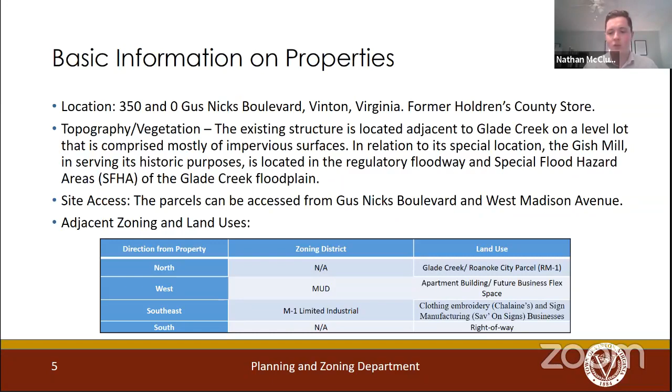To the north is the creek, and across from the creek is Roanoke City, where our jurisdictional line is. West of it is the Billy Bird Apartments, the future site of the Billy Bird annex building, and the Glade Creek Greenway. Southeast is Chalaine's Embroidery and the Save on Signs industrial property. To the south is Gus Nicks Boulevard, which has a really wide right of way.

This graph shows exactly where it's within the floodway, marked with hash marks on the floodplain layer. The blue layer is the 100-year floodplain, and the orange layer is the 500-year floodplain. In terms of regulations, you just focus on the 100-year floodplain and the floodway.

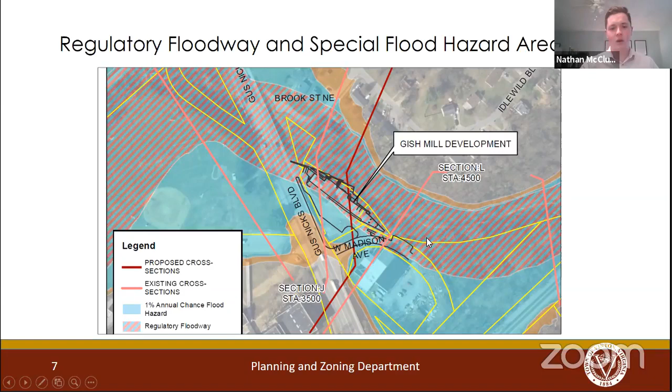This calls for special considerations for the building because, being a CRS Class 8 community, we enforce our floodplain ordinance strictly and go above and beyond the minimum standards of the National Flood Insurance Program. Because of that, if this were an empty vacant property and someone wanted to build on it in the floodplain, it would be a really cost prohibitive project.

With this being a historical structure, there's a certain degree to which you're allowed a substantial improvement to a building if it's deemed historical. This building has been deemed historical and is currently eligible for listing on the National Register of Historic Places. So that checks off the box for whether we could substantially improve this building.

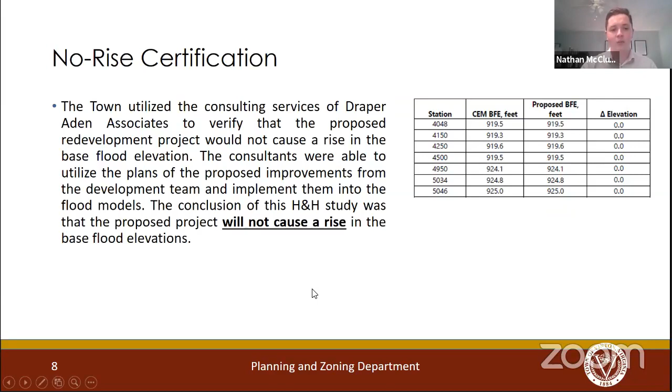The next phase is getting variances to prove that all the proposed redevelopment of the property and its activities will not cause even an inch rise in the floodplain levels. We contracted with Draper Aden, and they took the model from the group at Hill Studio and the development team and put it into the flood model. They showed a rise of 0 — no rise at all in the base flood elevations from any of the activities involved with this redevelopment.

As I mentioned earlier, on March 30th we're going to have to go before the BZA, as the town and the property owner, to request certain variances — not a wholesale exemption from the ordinance, but certain exemptions because of its historical nature. For instance, you can't elevate the building entirely because it's just not physically possible to do so without destroying its historical nature. There are other regulations included in that variance that the BZA will be briefed on and hold a public hearing on.

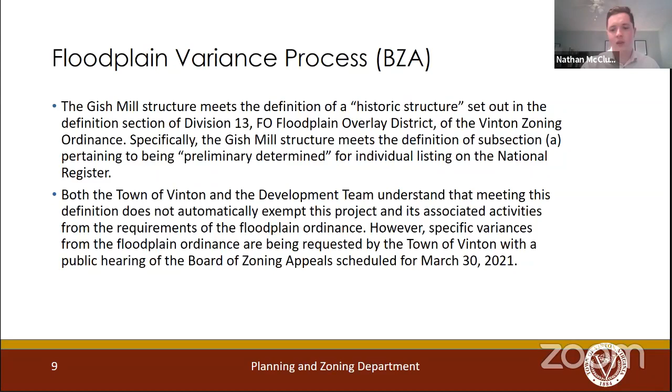This is in the basement. The basement is a pretty incredible feature of this property — the ceilings are really tall, and they have the original machinery. You can see the wheel inside that was powered by the water wheel outside. It also has a really incredible stone foundation.

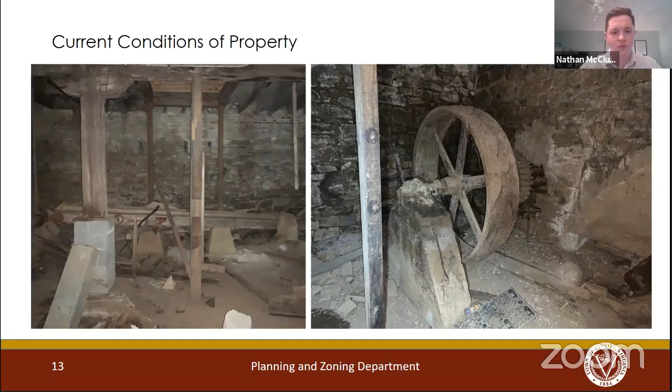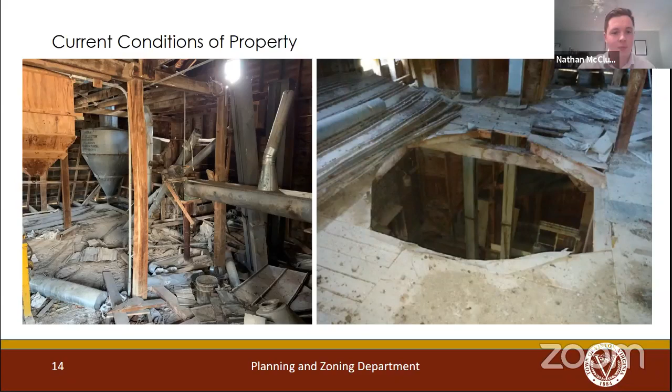Here's some of the second and third floors. As you can see, someone at one point had to cut a hole in the floor, possibly to get machinery in or operate some kind of equipment.

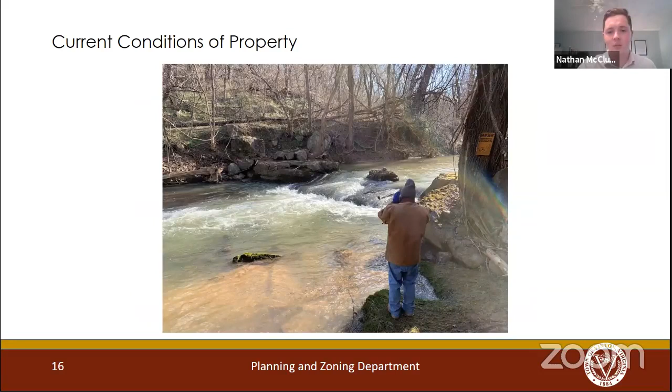This is the backside of the building. That's the race, or the sluice, where water would go and be diverted from the dam. And there's the dam, or what will remain of the dam.

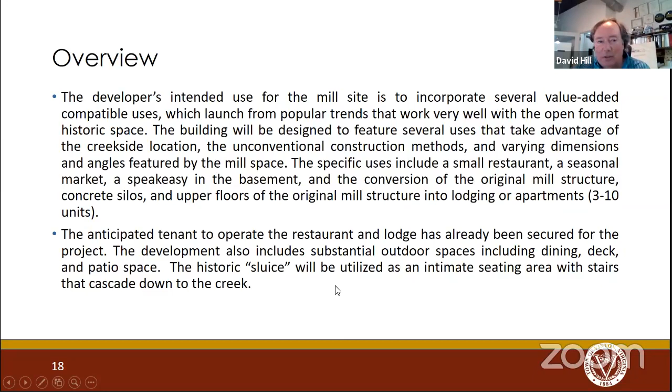And tell everybody if I missed something you want to make sure we emphasize in the text. So the uses you see - the restaurant, and even though I'm representing the land ownership company, which will be Gishmill Dave I, the restaurateur is proposed to be Dave Trinkle, who has developed Fork in the Alley, Fork in the City, and Fork in the Market - those three restaurants. He says this will be a little different theme from those, but you know his quality in developing these kind of special, outdoor and unusual places.

So the restaurant's about 5,030 square feet. The market, which is really a supplement to the restaurant especially for takeout - for the crowd that might be going to the lake, or for people that live in Vinton who want to stop by and quickly get a bite on the way home - will also have some retail things. That'll be 1,250 square feet.

The speakeasy in the basement is 1,296 square feet. The old silos and upper floors of the mill are 5,800 square feet. And then a new feature, the deck on the back, will be 3,564 square feet.

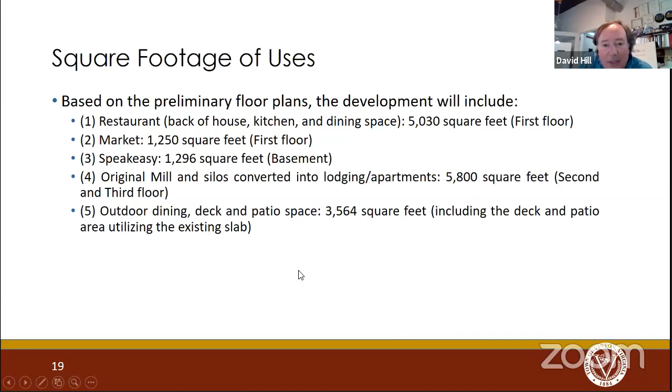Okay, next slide please. The site plan shows all this together, and we've developed it based on the proposed Roanoke City stream restoration project. You can see they've done an extraordinary job - they've got all the high quality trees marked, and some of the things they were proposing, such as channel improvements, are shown there in the blue stream.

You're also seeing in this site plan, in brown toward the stream, the large deck with red typical umbrellas that you might see over seating. And the little triangular shape, which Nathan might point out there on the far end - that must be the south end of the building, right there. That's the area where the unsafe wing of the building will be removed, leaving the concrete slab where we can put tables. Also, you're seeing a kind of unusual parking lot shape that we were provided.

We can provide a number of spaces there. But in order to supplement our parking, and also help with the greenway parking, you'll see a little additional parking added along the side street, right there, that our project will help provide. We wouldn't imagine that would be too much of a problem for the adjacent business uses, since our project will be busiest probably in the evenings, when nobody's working at the businesses nearby.

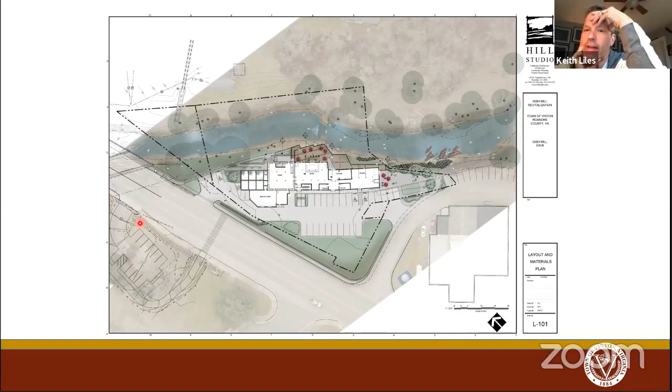Hey David, just real quick, a question. When I come across the crosswalk there on Gus Nicks, and walk up the hill, you could say, and then downhill, is the opening to the left, the small little opening, still going to be open as well, or is that a wall there? Or something open by the silos? Can you also walk across there and go down to the left and into the property?

Yeah, you can definitely go in there. There's a wall right where the crosswalk is shown, and that's shown on the plans developed by the town and VDOT. So when you walk across, there's an existing wall that'll be right in front of you, shown in dark green here. I don't know how to make that any better.

It seems like it's a spot which is low enough on the grade of the bridge that it's handicapped accessible, but you will have a little bit of a wall with a railing there as you walk across. So you can't just flop right into the property — you have to turn left or right. But if you turn left, you're welcome to come into the property, and then there you go.

See where the handicap space is just north of the cursor? That could also serve as additional parking. There are 3 or 4 parking spaces there, including the handicap space, for the greenway. And then there's a sidewalk system just to the left of the cursor. You can see we pick up the sidewalk coming across the bridge and take that on into our property to get to the deck, so people can come in that way as well.

Mr. Chair, this is Pete. I want to just highlight that the crosswalk's final design has not been done, so that could be altered slightly. We haven't quite figured out where that crosswalk from the parking lot, that Nathan's got the highlighter on, exact crosswalk will go across Gus Nicks. So that could be refined 30 to 50 feet in either direction. We're going to do our best to try to make that make sense and meet the grades and topography of the site, but that is yet to be fully designed.

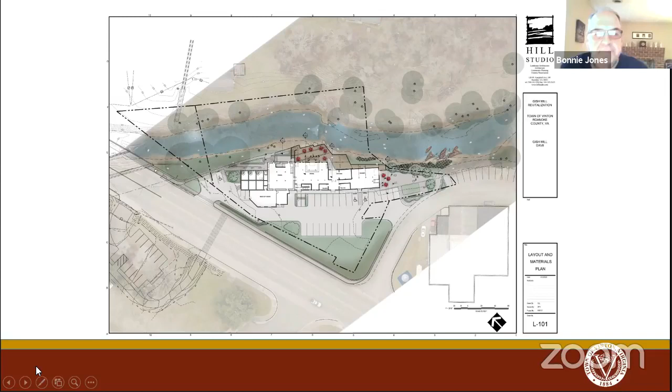Interesting. But I think it may depend on where you want to run the greenway. I know getting under the railroad trestle upstream has been kind of an impediment. So I know you eventually want to get to Vineyard Park - is it Vineyard Park you're trying to get to up that way? Yes, Vineyard Park, you're right. But you have to go under the railroad trestle line. I know maybe Anita and Pete know a lot more about the progress of that. I haven't kept up with it.

As far as Glade Creek Greenway Phase 3, we did apply for CDBG funding for an engineering study, but it was not funded. We are looking at alternatives because, like you said, Norfolk Southern - it's not easy to get approval for Norfolk Southern. So we're looking at other ways to connect that greenway to Vineyard Park. You're welcome to use any piece of this property that makes sense. It's just that running back there with the alcohol on the deck might have been a problem.

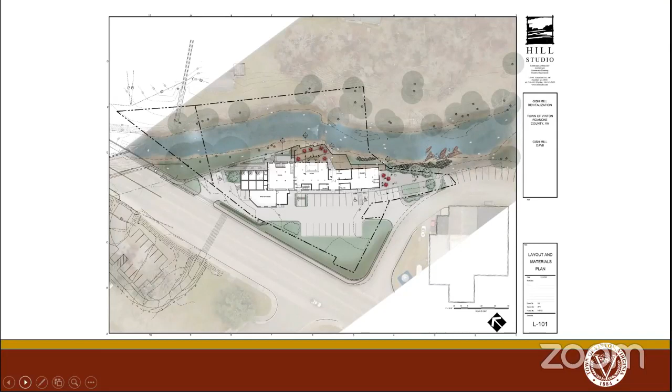Okay, want me to keep going? Please. Okay, so Tyler has done these really neat drawings of the mill in three dimensions, and here you can see how the deck and that triangular pad relate to the rest of the building up there along the creek.

One caution: the model is generally pretty accurate, but when you really zoom in for precision details, it seems like it's more together than the actual design - it's a study model.

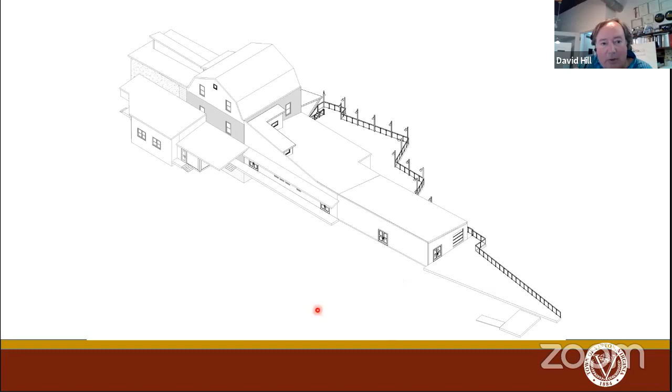So the next couple of images will show that building and how it plans to be used and relate to the deck in particular. You can see the old loading dock here in the lower left - that'll be the entrance into the facility for most customers. And on the very left end, that old loading dock will actually be the loading dock into the back of house facilities for the kitchen.

The way we designed this building, we really had to deal with the absolutely known issue of the floodplain. So that area Nathan was just showing you will be hardened, and that's where a lot of the expensive kitchen equipment goes. And of course, the old silos are very hardened, and that'll be where the lodging units are.

And then the old brick part of the mill, the upper stories, the ones with the windows, that'll be where the lodging is as well. The fact that it stayed there several centuries gives us a confidence that it can stay longer.

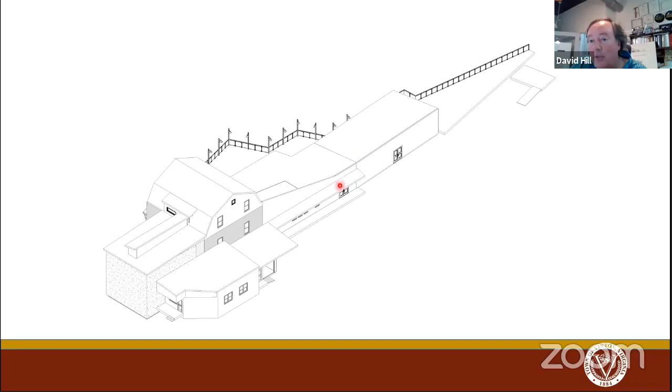The areas up to the right will generally be just designed so that the water can flow through them. We bring electricity down from the top, and we try to minimize the number of utilities under the floor because they could be damaged. We just need to know that probably during our lifetime, we'll see water in that part of the building, so we design in order to deal with it.

So if it works, it could be a model for other communities in a number of ways. For example, in Roanoke City, the whole biomedical park is in a similar floodplain, and those buildings were developed so that mostly it's parking on that first floor. But there are other parts of those buildings that can get wet, as an example.

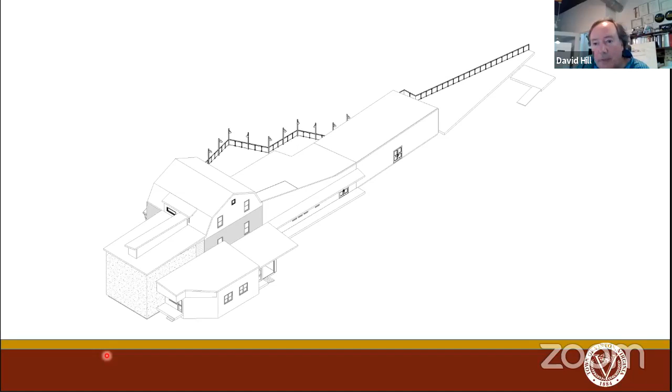This shows the part of the building that's on the back near the stream, and you can see on this side there are a number of punched openings, just so that we can roll up these large garage doors in the summertime and kind of flow from the building out onto the deck. And the kind of funny shaped roof there, I haven't really gotten into with Tyler about this in particular, but there's a kind of an interesting roof currently in this spot, and we keep the old sluice there. That's the old sluice that used to bring the water to the water wheel, which was in the corner.

So we're going to keep that area, and there'll be sort of two sides of it like benches, with a huge table between them, so you can have a kind of a large party of a dozen or so seated there in the old sluice.

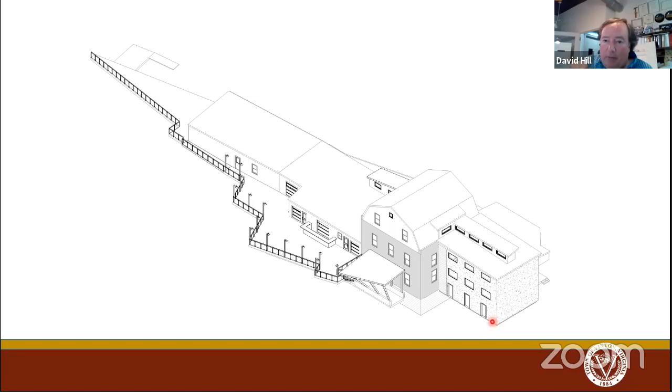And on the far right end, you see the old silos. They'll have doors right there against the ground, punched into those silos. That's a solid concrete structure, so the doors are carved in, and that'll allow a sidewalk to be right outside, giving access to those units right there.

Okay, this is just another view from a different angle showing that.

Okay, yeah, this is the only addition to the building, and you can see in the front that there's kind of a big false facade that was placed at one time, there, kind of linking the old brick part of the building into the newer metal additions.

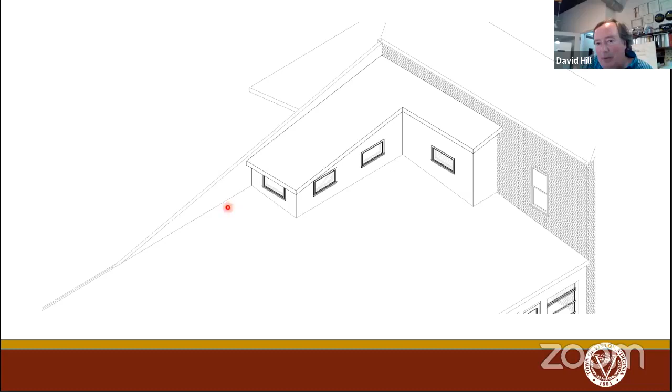And in order for us to get a good fire escape into the building, we have stairs below that, and we come up into a new hallway shown there with windows around it, and get from there into the old building. So we believe DHR is going to like this. They're pushing for us not to have any additions, but we've got to have a good fire escape, and so that's where this will be.

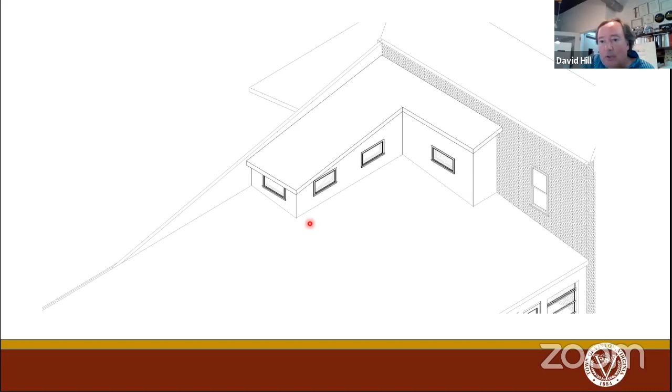You really won't see it from Gus Nix Boulevard. You may see a little bit of it from the bridge.

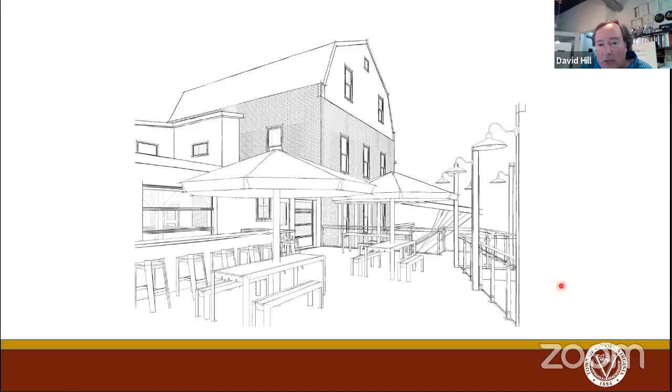Okay, and then this is sort of sitting on the deck in the afternoon. This is where you can hear the stream. Just to our right is the waterfall created by the old dam that's been torn down, but it's still got a big change in elevation there.

And then the next illustration, I believe, might be indoors. There you go, you can see the great big column structure. You probably saw that from Nathan's earlier picture. We've got a lot of columns and braces to work around, so Tyler's come up with some ingenious ways to incorporate them into tables and things like that.

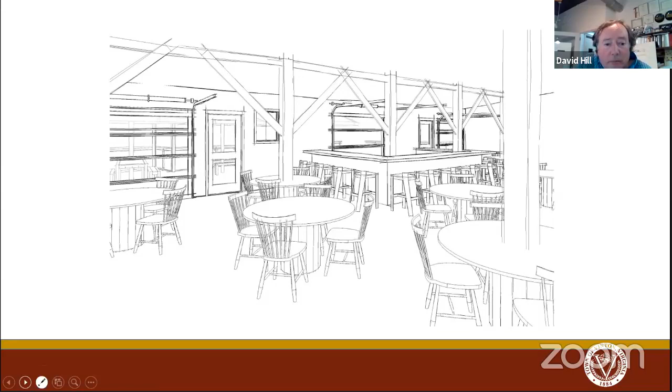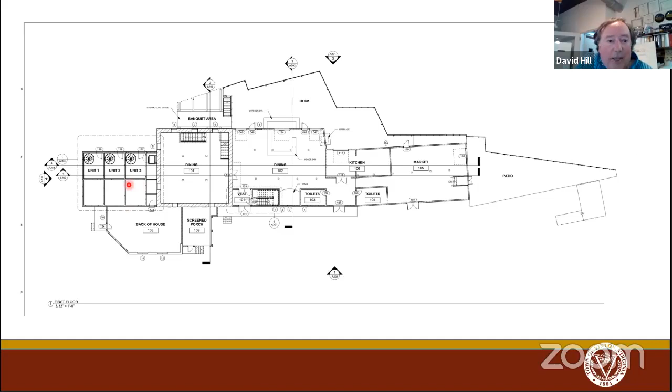Speakeasies in the basement. You haven't designed a lot of stuff there, but you can see just kind of what's there.

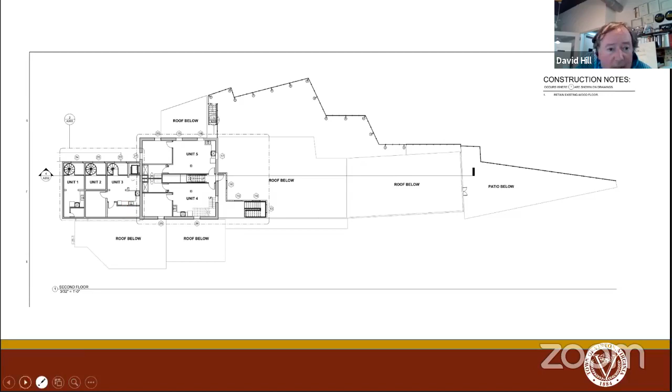This shows going up to the second floor. You can see two of the lodging units there, and the three lodging units to the left are in the old silos. And then the very top, third floor. So again, we have a couple of units in the old brick building, and units also in the silos.

And there's a light well in the silos too, which would be kind of fun to have the light coming down into that space. And also there's a little seating area right there at the entrance to the light well.

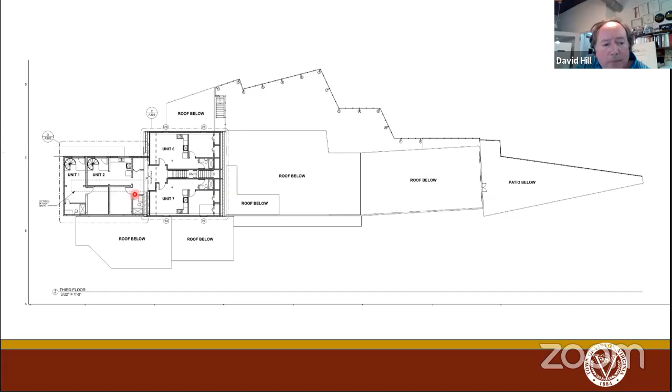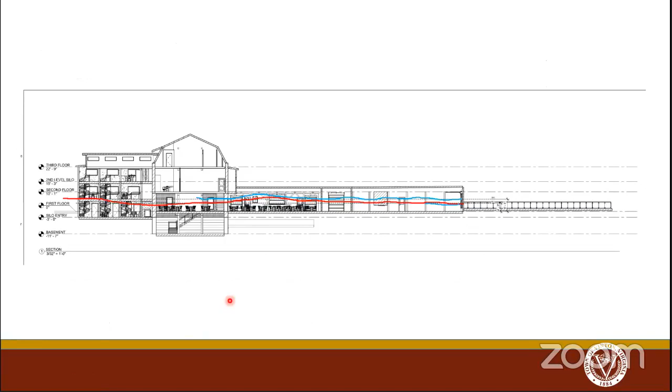David, talking about the flood elevation, what's a 10-year flood elevation? You know, that's a great question. I don't know the 10-year datum. That would be a great question. Does anybody, Nathan or Anita, happen to know?

It might be back on one of our earlier slides, but I don't know if we actually keep a 10-year datum on this screen. I don't believe FEMA really gets down to that. I'm sure there are mapping programs that do, but from a regulatory standpoint, FEMA only gets into really the 100 and 500 year for anything in relation to development, and also the floodway, if that's mapped to the community, which in Vinton, all of our floodways are mapped as well.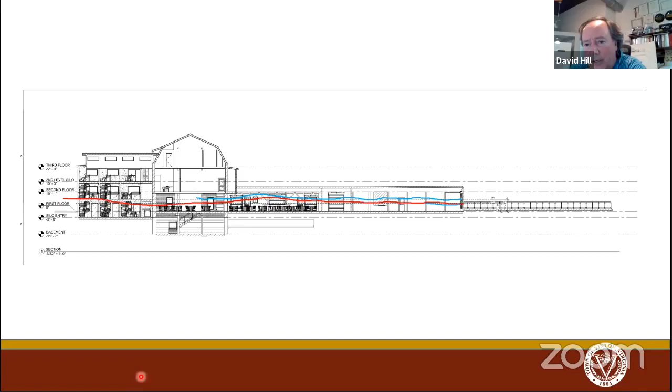You know, I've got anecdotal data on this. The fella who used to be the miller, a guy named Keller Poole, told me that he's seen water in the building twice during his lifetime. Once was the flood of 85, when everything got really inundated. And I think there was another time around the turn of the century, right around 2000, that he said the water got in the building, but barely, just enough to cover the floor. So the last time we've seen water at the first floor level has been about the year 2000, about 20 years ago. But that's just anecdotal.

But that's a great question. I wish we could answer it.

David, that concept is the same way that the now Cargill feed mill, used to be the Southern States, was built. Underneath was designed so that the water would come in, get through, and go back out. And in 1985, there was 18 feet of water on the warehouse floor.

Wow. And this probably could take those. Wow. And that was over a 100-year flood event. And that would have been where Keller was talking about. It was 18 feet there at the mill, and about 5 feet at his place.

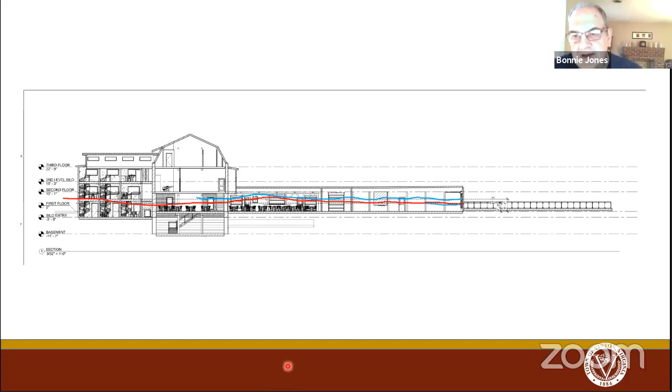Well, the Cargill mill, is that the one down next to the Roanoke City boundary, down Walnut Street? Used to be Southern States. 18 feet deep, that's 18 feet in the warehouse. And so I believe the Army Corps has come back and decided that the 1985 event, they call it a design flood. It's almost like the worst condition you could ever imagine, like a 500-year or 1,000-year flood. And that would be that upper line right there, I believe, on this mill.

And it's interesting you pointed that out. If you look at historic mills, they all have this problem because they put them next to the stream. So it's just kind of one of the unfortunate issues. If you want to save a mill, you're just going to have to deal with Mother Nature here.

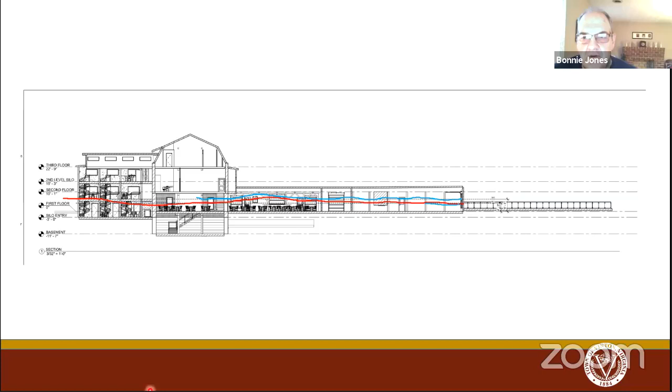You do have another source there right across the street from you, Shalane, Charlotte's dad, Mr. Leslie, or son Greg, who could tell you where the water was in their building, and you could take a sighting from that and know where you were. Great idea, I will talk to them about that. Thank you.

And they would also know about the year 2000 flood, I believe, since they were there then. These sections show the building from other angles, and again you can see that predicted flood level there.

Let's see, especially on these sections, you can see it almost gets up to the windows generally on 100-year flood level, and the 500 years up to the roof or ceiling there. So it can be really deep, so we have to just be ready for that. Things like the insulation system has to be designed so it doesn't hold water, those kind of things.

So we're using a whole lot of unusual construction methods on this.

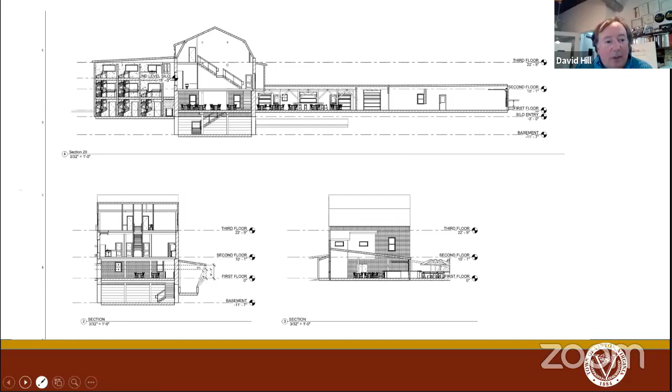Okay, Nathan, I'll hand the baton back to you. Yeah, thanks, David. Yeah, thanks for going over that. It's always interesting to see. I actually learned something new from the last time, so it's good to keep hearing more about it.

So from the future land use for this property from the comprehensive plan, and then also the updates from the UDA plan in 2016, this property was determined in the future to be general commercial. Across the street, those have been rezoned as MUD, but during the 2016 UDA plan, they were designated as high density residential, parks and rec, and community facilities. And of course, the Shalane's property was also designated as general commercial in the future.

So with that said, the staff recommend approval of this rezoning. We find that the mixed use property, accommodating those different uses, will be consistent with the existing uses on the adjoining properties to the west and southeast, which contain both residential with Billy Byrd, and commercial uses with the future Billy Byrd Annex and the currently existing Shalane's and sign manufacturer.

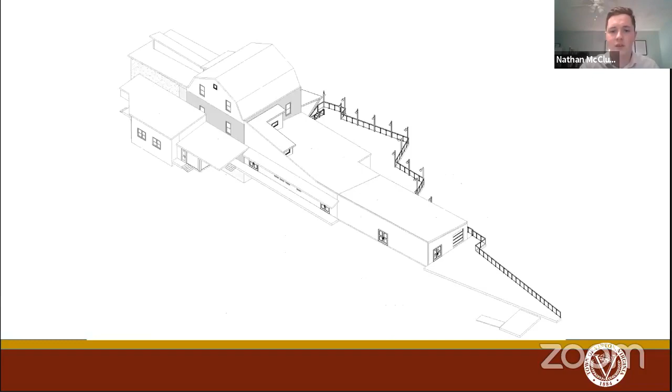No. Let me go back to the zoning map. So only these two parcels are going to be rezoned to MUD. Mr. Leslie's property down here will remain M1, limited industrial. And actually West Madison Avenue is town right of way, so even though it has a zoning designation, it's actually just public right of way. So across the street will still remain M1—it'll just be these two parcels that are rezoned to MUD.

Thank you. No worries, good question.

Have you gotten any comments from the community, people who like or dislike the idea? Our office hasn't received any formal responses, like the legal ads in the paper, but those just ran last Thursday and this Thursday, so I expect we'll have more comments after the second newspaper ad. It was also in the paper today because the State of the Town address talked about it, so I think we'll get more comments. But most of the informal comments I've heard have been excitement and looking forward to it.

Being brought back to a new adaptive use, and all the benefits that it'll bring to the community.

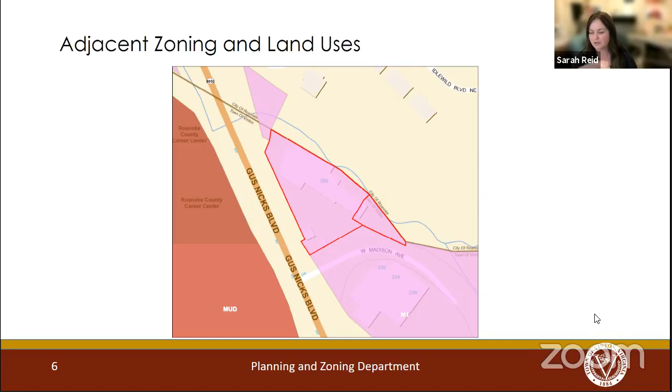I just had one question. It's kind of small, but along the back side of the building where the deck is going to be, is there going to be water access where people can walk down to the actual creek, or is that going to be sealed off?

Well, it's really steep back there, and that's an interesting question. Right now what we have over on the left, if you see where the handicap parking space is, from there down we have a series of ramps to get you into the speakeasy. You actually go under the deck a little bit to get into the speakeasy. It's pretty complicated. This is kind of like going into a coal mine.

But the area where this ramp goes down and under the deck could also give people pedestrian access down to the stream side right there. It will be just outside of where those umbrellas are, right where Nathan's hand is showing you. So it will be possible to get there, but there's just not a whole lot of room. And everything from the deck on upstream is really way too steep for people to access. But that little area just outside the deck, I believe you could walk down to the stream right there.

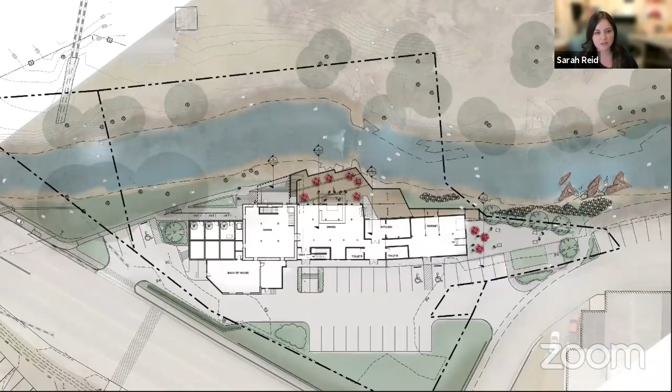Okay, yeah, I've never seen the waterfront there, so just wanted to check on that. Thank you. It's actually a beautiful place back there. You wouldn't think that it looks like it does back there, but it is beautiful.

I'm not sure if everyone on here knows, and Pete knows, probably Pete and Nathan and Anita know best, and probably David, but there are plans, and I think Nathan mentioned at the very beginning, of the creek revitalization, that they're actually going to move and widen that and make it go underneath the bridge at a different angle. Which will also, from what I understand, and I could be wrong so Pete, correct me, but it'll also be wide enough and deep enough for people to canoe and kayak and tube down that by there, and end up at the 3rd Street canoe launch. Is that right, Pete?

That's the city project. It's not our project. I can speak to that.

This is Nathan. Roanoke City is currently undergoing a stream bank restoration project from the railroad bridge, heading north up Glade Creek, all the way down to the city limits past the Billy Byrd Apartments property on the creek. So they're doing a complete stream bank restoration project that's going to restore the stream functions and reduce erosion. Specifically across from the mill, they're going to be implementing various techniques to slow down and help with the movement of water down this portion of the creek.

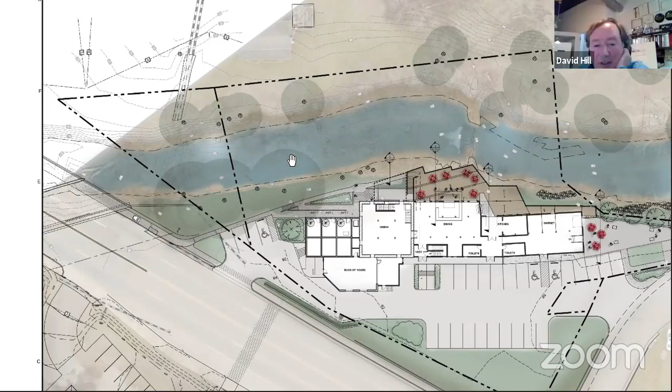Hey, if you like, I've got a couple of pictures I can show you. Nathan, maybe point out that little white triangle that is just outside of the deck - it's actually where the old dam was, and you can see the water. It's kind of white there, where it comes over. See that area?

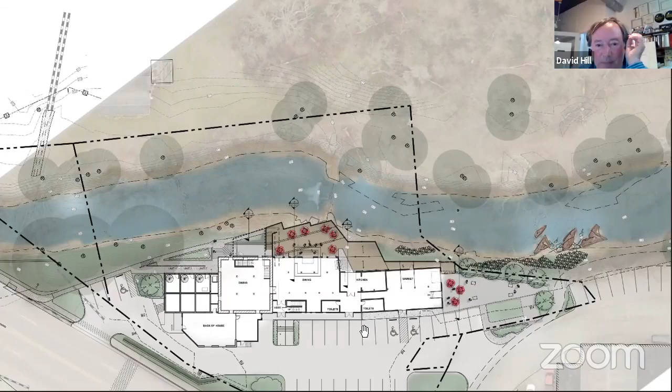I'll share this picture with everybody. Check this out, can you guys see this photo? Okay, Sarah, you see this one?

I believe people could just walk down here to the water, and it's really quite beautiful. It's a real surprise because the building looks kind of industrial, and you have no idea there's a stream back behind there. Yeah, I had no idea. It's really neat, so I believe that's one of the real attractions to this.

We're really looking forward to sharing that with everybody. One of the exciting things I'd be interested in, I'd like to look around - I've never been in the building other than the showroom. I'd really like to look around before you start taking things apart.

Sure, for the repurpose, especially the milling part of the facility. And I hope that in the speakeasy room you leave some of that stuff down in there. I mean, it's just for looks now - you would never use it for milling anymore, but it sure would make some nice talking points for people to see.

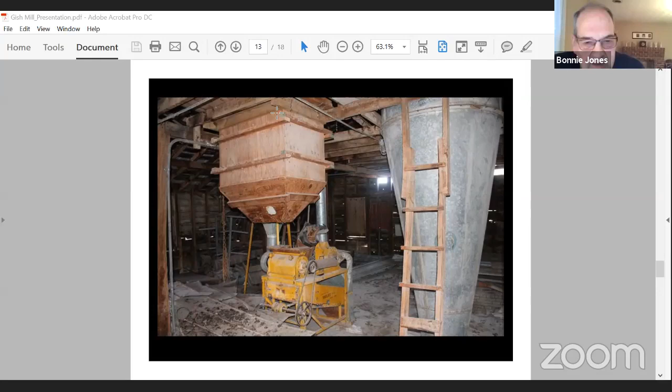Okay, thank you Nathan. That's the bottom of a... well, the box is where the grain came out, and that yellow thing is a grinder, and the metal piece next to it is the bottom of a cyclone, where you took the air back out of the bins when you put stuff in. Wow, that's what those are. So cool, you've got a lot of neat stuff in there just from these pictures.

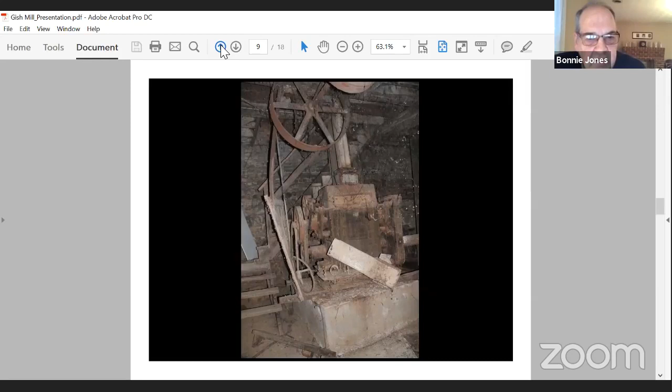That would be a shame for somebody not knowing what it is and just saying, oh, that's a bunch of junk, and take it out. There's a lot of historical stuff right there that would be neat, just painted and left in place.

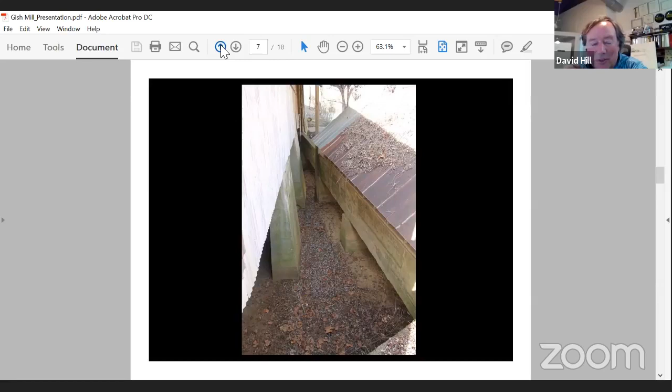Well, a lot of it we plan to, but I'd love, Mr. Jones, if you would volunteer to go through - we would love to get you to share your thoughts on what some of these things are. We will interpret a lot of them in place, but some of them are so big we may have to remove them. We'd love to get your thoughts on that, if you have time - I'll follow back with you and we'll find a time to walk through. I'd really appreciate that.

That would be great. As you see, a lot of those great big pulleys, we do plan to leave those in place - they'll be in the guest rooms and in the restaurant. Well, I'm thinking a little bit along the lines of on the Parkway, the Mabry Mill, which still works, and you're not going to be able to do that, but you've got some of the exact same equipment there that could be showplaced and used as ornaments in that building. Yes sir, that's right.

I'd love to get your thoughts on it, it'd be really neat. So I'll follow back - Nathan, you'll have to put us in touch and we'll have a chance to walk through and show all that to Mr. Jones and find out what some of those things are. Yeah, a Plan Commission field trip. Yeah.